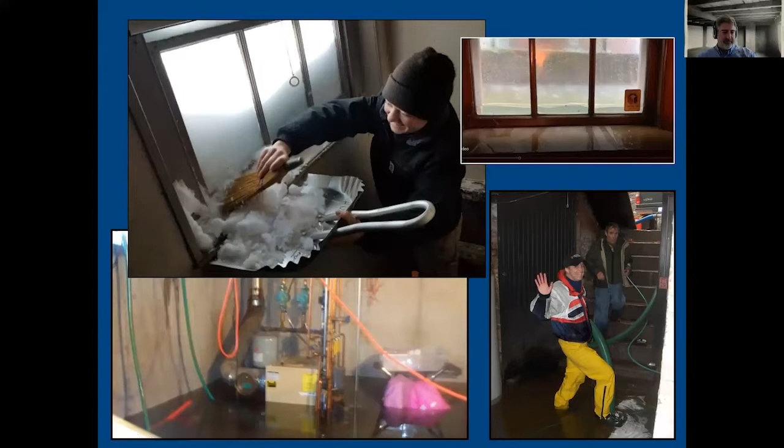Mary had asked me to talk about some of our initiatives. And so I'm going to focus on three different aspects of climate change and the resiliency work we're doing. And I'll say that we are very, very focused on rain events. I think July and August have been the rainiest in a long time, as 17 inches have fallen. We had an additional 6 inches in the last week. It's a lot of rain. And when you're dealing with a collection of historic properties, you think about rain all the time.

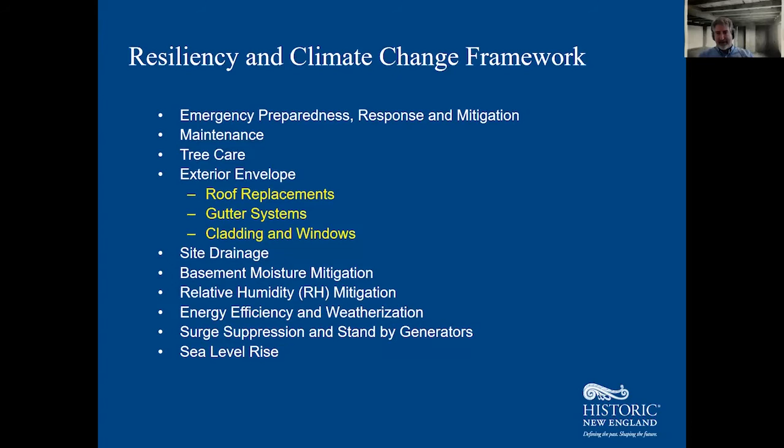And that's not to downplay, of course, sea level rise, which I know Nantucket is very focused on. But I spend a lot of time thinking about rain and how water is coming down from the sky and affecting our properties. As Mary mentioned, we do have a framework for resiliency and climate change. There's lots of items here on the list, but we're going to really focus on three different initiatives that we've been working on at Historic New England: gutters, site drainage, and energy efficiency.

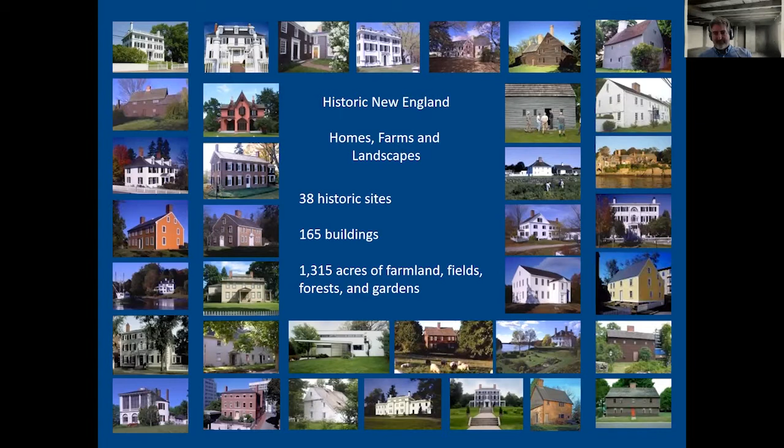Historic New England is a regional preservation organization. We do many different things, but one of our most public aspects is the 38 historic sites, which range from Rhode Island up to mid-coast Maine, 17th century to 20th century houses. There's over 165 buildings and over 1,300 acres of landscape. And I'm responsible for the preservation and maintenance of those properties. So everything from brush clearing to garden restoration, from heating system maintenance and gutter cleaning to roof replacement. All of it is in the effort to keep our properties looking the way they did at a specific time.

So my job is also very focused on house museums and presenting a period in time. So it's a little different than a house in a historic district, which may have certain restrictions on it. We actually take it to the next level because we're really trying to preserve things to a very specific time. And that sometimes is limiting in how we can approach things. But I think climate change is shaking things up a little bit and forcing us to rethink some of our approaches.

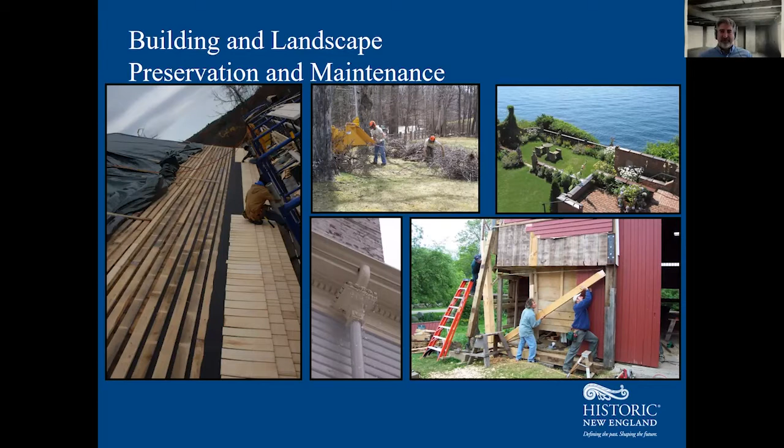So let's start with gutters. And I think we have to start in 2018 when we received a grant from the Maine Historic Preservation Commission through the National Park Service to analyze the carrying capacity of our gutters in that state. And so we started with 3 core questions. And I'm going to give you the answers that I thought we were going to walk away with from this study. Are our gutters good enough for today's rainstorms?

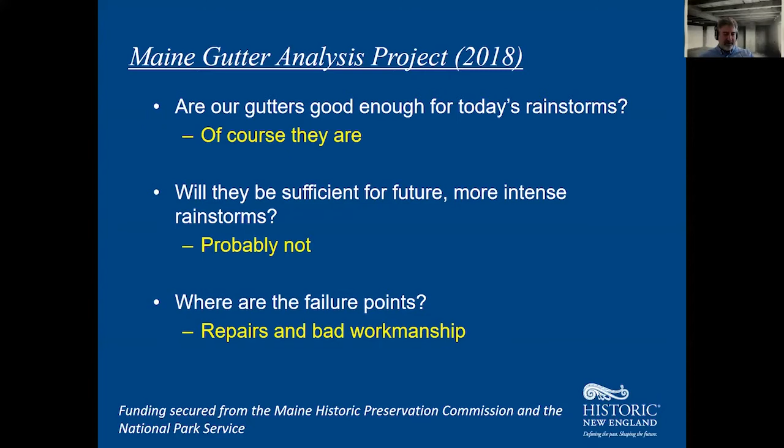Of course they are. They seem totally fine. Will they be sufficient for future more intense rainstorms? Probably not, right? That's the whole thing about climate change. Things are just going to get worse. So probably the gutters won't hold up long term. And then what are the failure points? We were kind of perceiving some repairs and bad workmanship being the core issues that might be stopping up some of our gutters and kind of preventing the flow of water. So this was our hypothesis going into this study.

And why gutters? Well, of course, it's part of the major defense system for your building. So you've got the roof keeping the water out, but then the water runs off the roof into what? Well, either the ground or a gutter system. So that's keeping the water off the side of your building. It's keeping it from the foundation of your building. And if the gutter system fails, then the water starts to deteriorate the paint. It starts to get into the wood. It starts to work its way into the building in many different ways. And we've seen a lot of them at Historic New England.

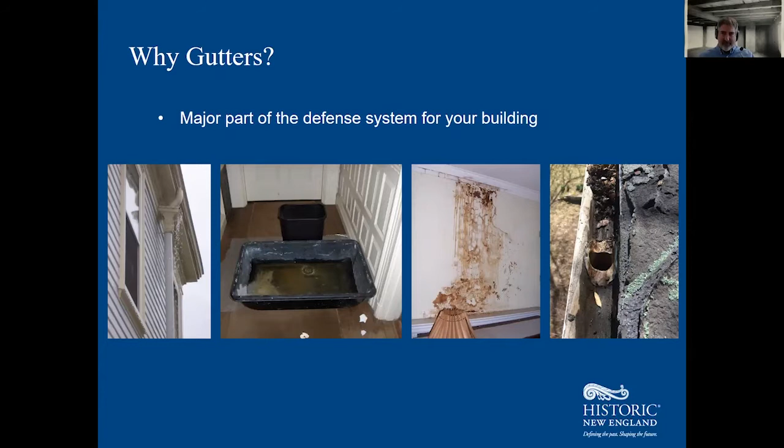So this gutter study, we had 9 sites in Maine that we were looking at, 7 of our house museums, and then Historic New England also has an easement program with 116 easements, so private homes with preservation restrictions that we hold and monitor. And so 2 of those easement properties were included in the study. So 9 different sites throughout Maine, and we were looking at 21 different roof drainage systems. So it was like 21 different instances where a roof and a gutter kind of met up.

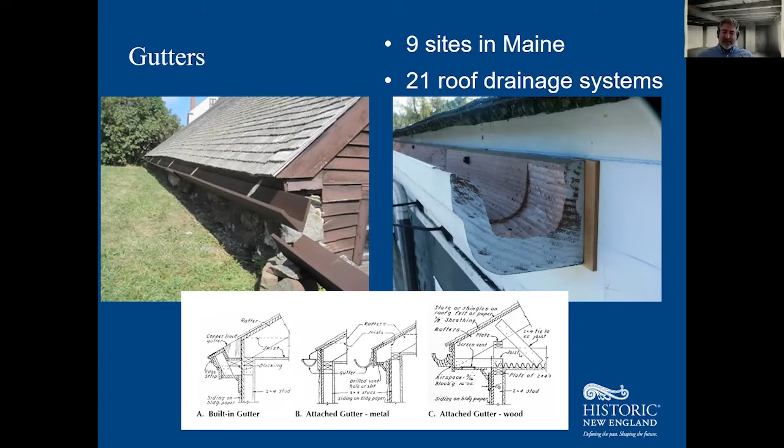And what we were doing was we were calculating for capacity, and there's some standard formulas that you use. If you Google this, you'll find there's some key factors like the area of the roof, the slope of the roof, the intensity of the rain, and then the dimensions of your gutter component. If you're designing from scratch, you do the first 3 and figure out what the dimensions should be. We had to do a little reverse math to figure out that's what it should be, but this is what we have, and how does it all match up? So there was a lot of math, a lot of charts, a lot of cross-referencing. But let's just remember the rain intensity.

So we're looking this up online, and most of the online resources that are telling you how to calculate rain intensity are all pointing to basically the same data charts. And that's really important because the data charts are from 1977. And so with gutter calculations, if you just did it yourself, you would probably be led to make a calculation based on 1977 rain.

We found the National Weather Service has more up-to-date rain intensity numbers, and there's this kind of complicated 10-year rolling average that they use to figure out what a 10-year, 20-year, 30-year storm would be. And so we went to the National Weather Service and we pulled more up-to-date, like 2015 numbers for rain intensity, and it was a 25% shift. That is major. That is a major change in intensity from 1977, and that really does affect how you design your gutters. And so that was a really important data point in this project.

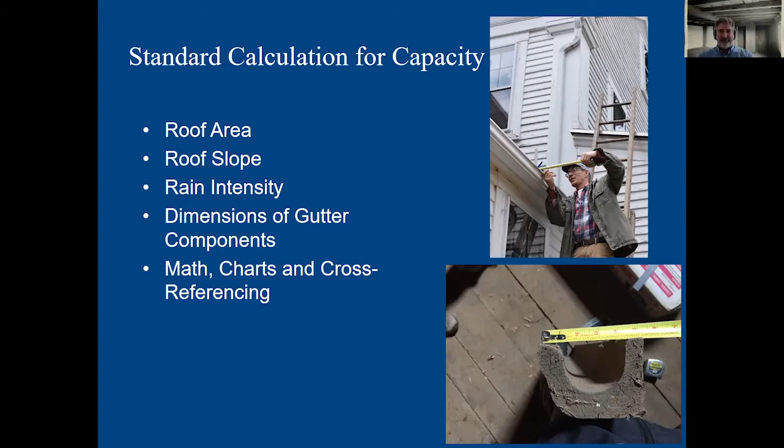So what did we find? We looked at all of these gutters, we did the math, we crunched the numbers. And there's three components to a gutter system that we were really looking at. So the gutter is obviously the horizontal piece that's kind of at the end of your roof, the eaves of the roof.

And what we found was 50% of the time, the gutters failed the calculation. They were not big enough. They didn't have the carrying capacity for the roof that they were trying to empty of water.

Now there's a lot of variables there, a lot of different types of gutters that we looked at. We looked at modern gutters, we looked at wooden gutters, we looked at half round metal gutters. There's a lot of different variables, a lot of different size roofs. But still, in the end, there was a high failure rate for gutters.

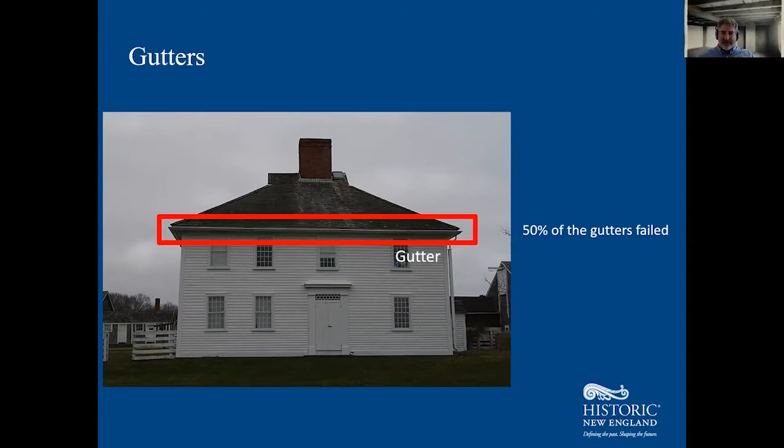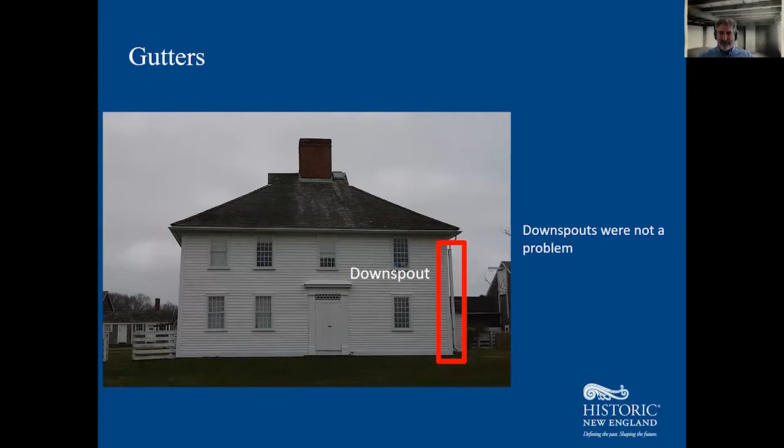Downspouts, so the pipe carrying the water down the building, effectively at that point, the downspouts were not a problem. Once you got the water running down like that, that wasn't really where our problem was. Our problem was really in this outlet. The outlet is this pipe that connects the gutter to the downspout. And what you find over and over again on historic houses is this tiny, tiny piece of metal, this little pipe. And that was a core issue.

50% of our outlets failed, and there was a lot less variability on this. Either it was under 2 inches and it failed every time. So the diameter of the outlet was under 2 inches, or if it was over, it had a much greater success rate. And so this is some key data that we pulled from this choke point.

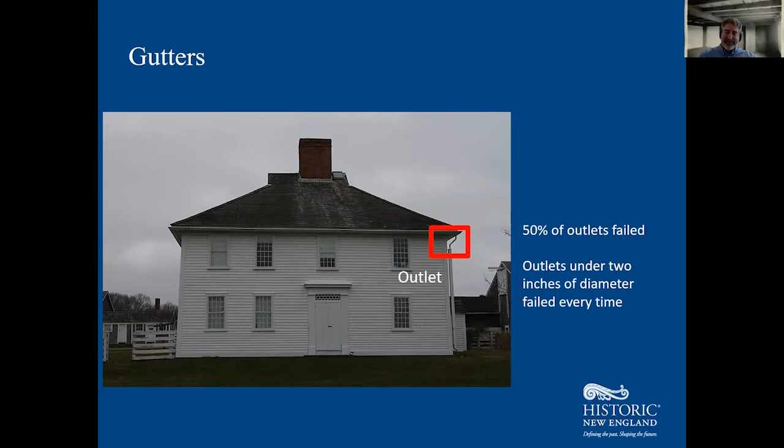If you can imagine it, you have all this water rushing down your gutter, like in this image, and then there's a tiny hole. So where's the water supposed to go? And what we always perceived as maybe a clogged gutter was in fact water not able to drain fast enough down the tiny hole and overflowing the sides. So we always said, oh, the gutter needs to be cleaned. But then you go up there and it's kind of fine. I wonder why all the water's spilling out like that. Well, it's because the hole is too small.

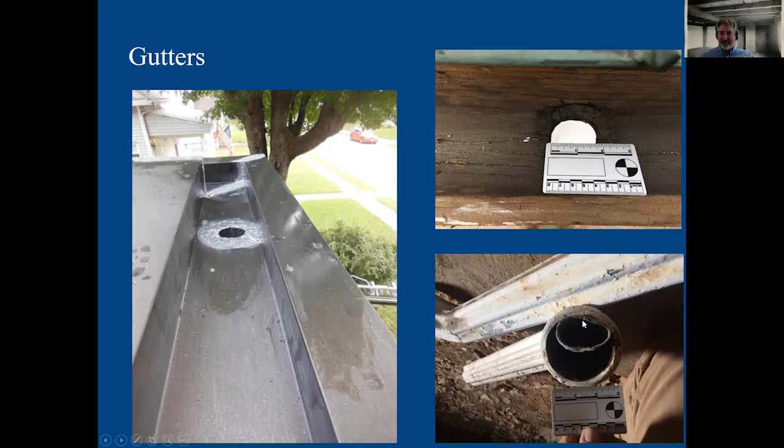And again, here's a wooden gutter with a less than 2 inch hole. And then just to illustrate, here's the outlet, why the downspout's not really an issue. It's a really small downspout, but look how small the outlet is. So the downspout is going to carry the water fine once it gets there. It's really, can you get the water to the downspout?

So if we go back to the initial 3 questions that we posed, are our gutters good enough for today's rainstorms? Well, no, actually, they were not. We had lots of issues. So will they be sufficient for future more intense rainstorms? No, if they're not working today, what makes us think that in 20, 30, 40 years, they're going to be working better? They're not. The rain's just going to keep getting more and more intense if the predictions are true.

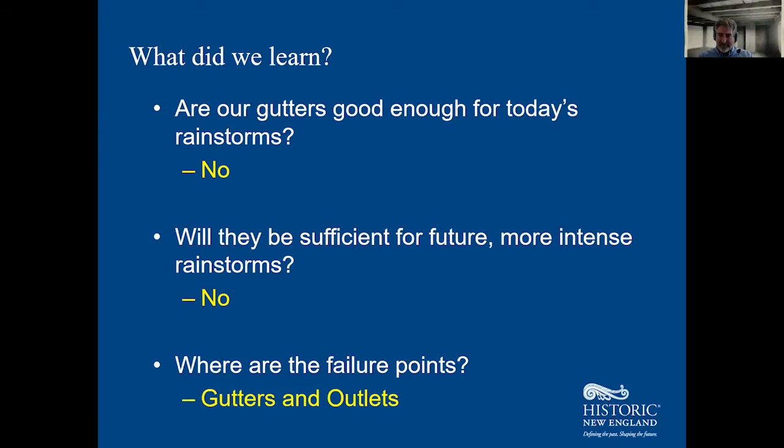So what are the failure points? It's not the downspouts. The downspouts are almost irrelevant. It was the actual gutters and the actual outlets. And so this is critical, right? This is a major point of defense for your building.

So what we're thinking about is, first of all, you've got to pay attention to your gutter. It's kind of easy sometimes to ignore it. Mine at home gets clogged all the time, and I've got to go up and clean it. But you want to kind of ignore it because it's just this chore. But you've got to pay attention. This is really important to keep the water moving.

As I mentioned, if you're going to calculate, or let someone else calculate the size that your gutter should be, use the current rain data. Make sure you really understand what is going on. Now, Maine was 25%. We did the same exercise in Rhode Island, and Rhode Island's change over 1977 to 2015 wasn't as significant. So it's going to be different, region by region, town by town. But you should look at that data, because it's really important, and make sure it's as up to date as possible, because you want to think about sizing when planning a project.

Now, this isn't just a new roof, a new building and a new gutter. It's your existing gutter. So if your gutter is starting to fail, or it's not working, or you're doing the roof and they say, hey, we should replace the gutter at the same time, think about how big it is. Think about whether it's carrying the water. Think about whether you've seen water spill over the sides. Maybe do the calcs, or ask someone to do the calcs for you to figure out what's going on.

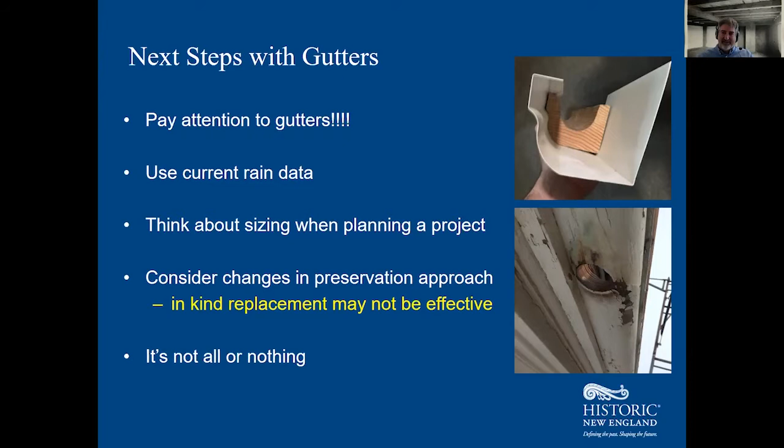And so it's not all or nothing. We can do baby steps also. And we've been seeing great success where we've just increased the outlet size. They're calculations, it's math, and it's giving you a pretty strong sense of what's going on. But if you need to, you can just do part of it. And that's kind of what we're doing with gutters.

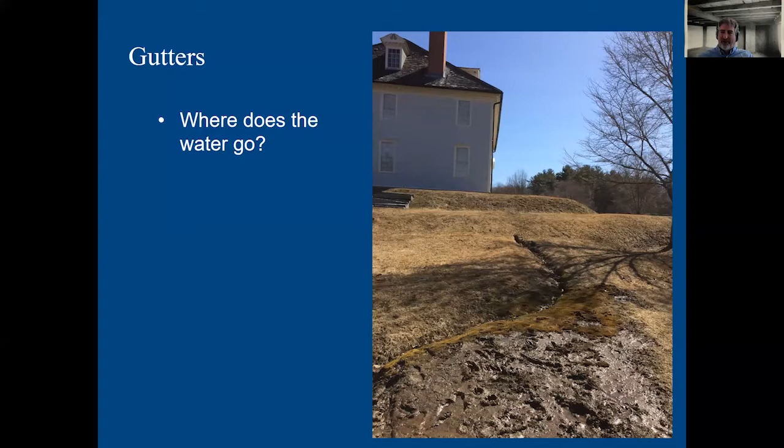But 40 years ago, they said, we're going to outlet the water here in the middle of this terrace. And actually, this was never an issue. But now that we're getting more and more intense rainstorms, we're seeing dramatic erosion at the outlet spot. And so you really have to think about where the water goes once you get it off your roof. And so that's our next point, which is site drainage. And we're spending a lot of time really focused on how water moves around our sites.

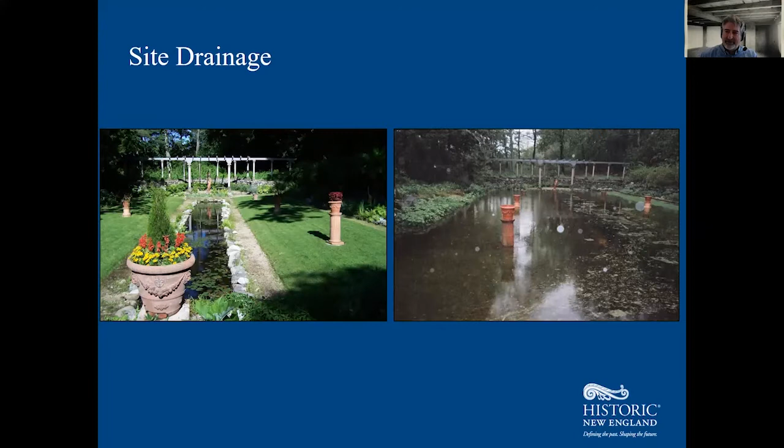And a lot of this came in part in 2010. There were some huge rainstorms that struck the area, and everything was overwhelmed, and we got flooding everywhere. And it made us really think about site drainage. And this was long before we were even thinking about climate change, but we were saying, hey, we've got an issue with water on our sites, and what are we going to do about it? And so we really wanted a holistic approach, because I could fix one thing, but it may cause another problem somewhere else. And maybe we should look at the whole picture.

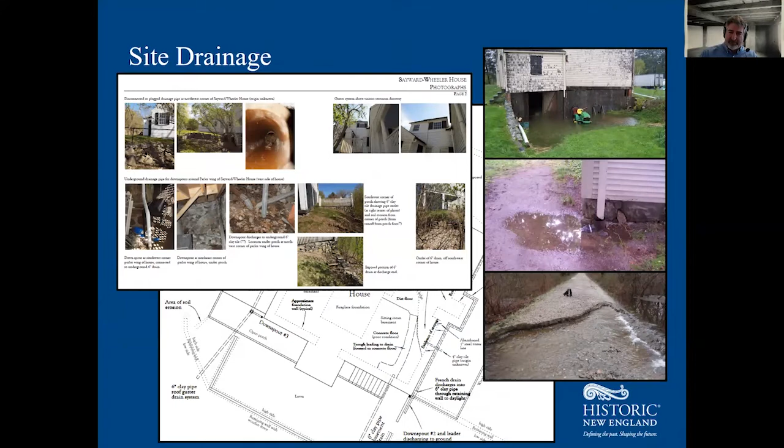So we did holistic site drainage assessments, where we were like, how is the water moving at all of these different sites? What are the components, and what is working and not working? And ultimately, how does that all play together in a big project to solve all the site issues with drainage? Because again, it's like a ripple effect. If you change one thing, it probably will ripple over to another area.

A colleague of mine just showed me a gutter example, where they upsized one gutter to handle the rain because they were seeing water fall down, but they weren't really paying attention to the fact that all of that water was outletting onto a secondary roof, which still had a very small gutter. And so they resolved one issue and caused the ripple effect. Now they're causing an issue in a second place where the water overflows, hits the ground, and gets into the foundation. So again, holistic thinking is really important, especially when you're thinking about water and how it moves around your site.

Now, we have the added issues as a house museum organization. We have archaeological artifacts, and we're very careful about those. And so we'll work with an engineer, we'll design a plan, but then we bring in the archaeologists and we figure out what's going on under the ground, where maybe the engineer wants to do stuff.

Then we tell the engineer, like, these are deal breakers, you have to change your plan. The engineer gets mad, but we're a preservation organization, so we're trying to protect the resources both above ground and underground. But eventually we come out with a plan. Now, the other wrinkle is that I want to do this work with a minimum of change to the historic landscape. So we also want to respect how the grounds look before, and we want to keep it as similar.

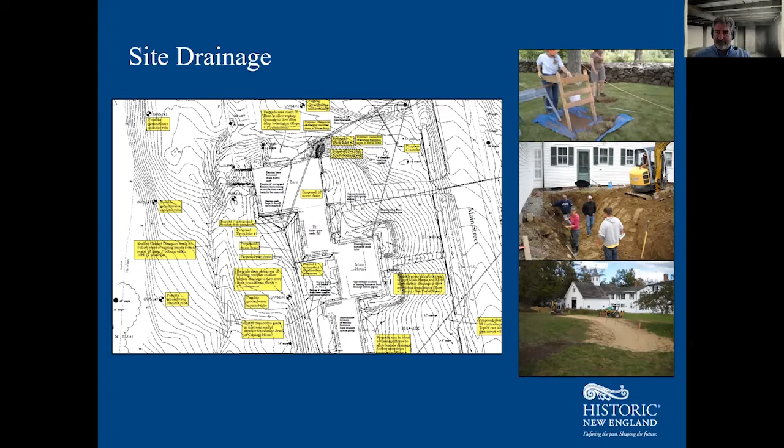So again, our points about site drainage are really about thinking holistically. We favor gravity. You can use pumps and you can do all sorts of things, but those will fail. If you have a power outage, the pump's not going to work anymore. And so then the water's not really moving away. So you always want to try to think of, water moves down and can you keep doing that? But also, it's important to think about the aesthetics of your site.

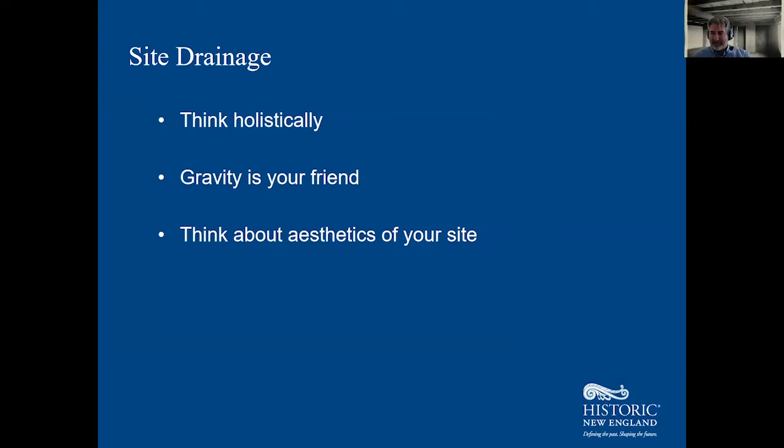But in all of that, and all of the catch basins and dry wells and different site drainage things we've added, we still haven't really solved the where does the water go, because it's still got to go somewhere. And most sites and most towns will tell you have to keep it on your own site. And so how do you do that?

And sometimes we're blessed with large acreage, and obviously we have houses in urban environments where we don't have a lot of space, and we have to tackle this in all of those, because even if you have a dry well, there needs to be a release valve for when that maybe gets stressed by storms. So then that's releasing water. Where is that water going? It's like a never-ending series of questions.

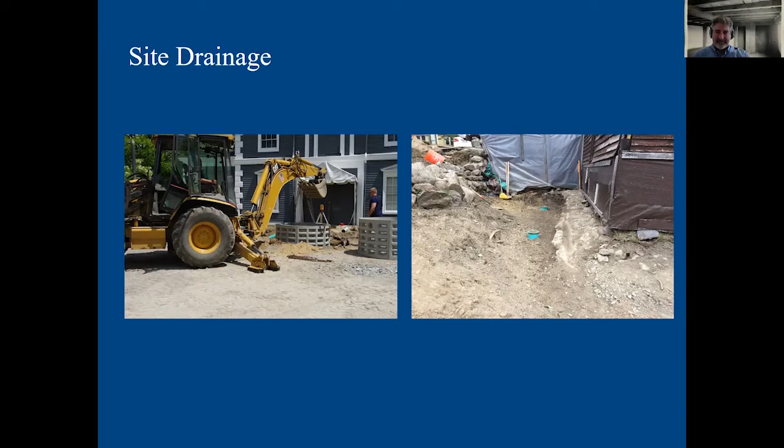And really, in the early days, we were focused on what's called a level spreader. And this is a horrible image, and I couldn't find a good image of this, but basically we have all of this kind of water being channeled, and it's got to come out somewhere. We've got to just let the water go. And so at this site, all the water kind of gets merged underground into a location where we can then outlet it with basically a 100-foot gravel trench that allows the water to kind of push out over the gravel trench, not cause erosion, and then filter back down into the groundwater in that way.

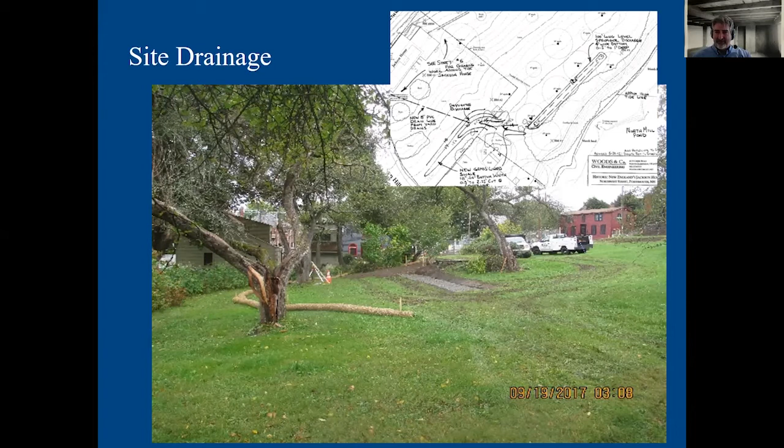And that's effective, but for me, in terms of historic landscapes and aesthetics, we can usually hide this, but it's not my favorite approach, which is fascinating because now we're in the age of really thinking these things through. And so enter rain gardens. We only have 1 or 2 at our properties, but the rain garden is also an alternative for stormwater management.

One that's very effective in many locations, in many urban environments, where you're taking the water and you're basically creating a bioretention area where you're allowing these kind of swampy water plants, so all natives, all kind of good for the environment, to take that water, help absorb it, but also help filter out the bad stuff in the water, while then the water sinks back down into your groundwater.

And so this accomplishes many different things. It provides that kind of pollution filter. It provides the groundwater that the level spreader does, but it also provides this interesting habitat opportunity with native plants. And what are you doing there?

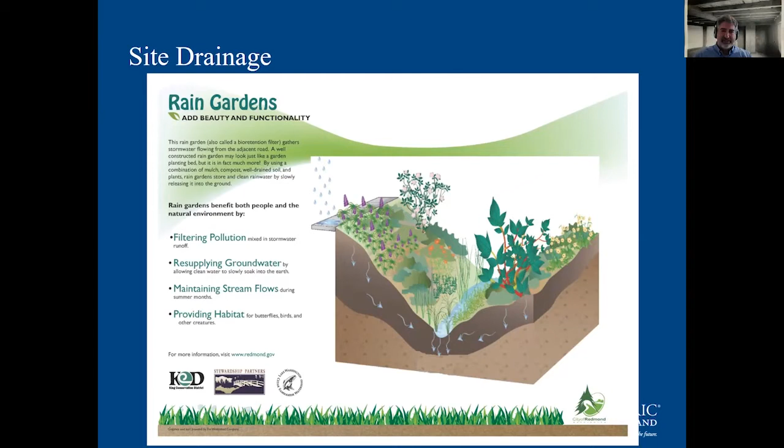And so for me, that gives some opportunity to rethink how we present some of our landscapes, and even reintroducing more native plants in a specific way to help mitigate stormwater management. That's also aesthetic and also good for the environment. So this is kind of the area we're exploring.

So I didn't really talk about climate change with our site drainage, and in part that's because it's been very effective so far, and we haven't had to change very much of our approach. But we are deep in planning 3 different kinds of site drainage projects with 2 different engineers, and we've been discussing this topic with them. So, my experience with the gutters tells me we need to upsize everything.

My experience with the civil engineers is that, unlike the roof planning, which maybe is a little bit more contractor based, maybe an architect does it, maybe the homeowner does it like us, there's a little wiggle room. I'm not qualified to do site drainage engineering, and neither is a contractor, and so we hire an engineer, and the engineers are thinking about this stuff, and they're also using the data that we need. They're using modern data, like the code tells them to go get the current data from the National Weather Service. So they are thinking about this.

That being said, we've had many conversations where they're like, oh, all you need is a 3-inch pipe, and we say, okay, that's great. How much is it going to cost just to upsize that to 4 inches or 5 inches? It's underground, no one's going to know, we're excavating now. Can we make this bulletproof for 100 years? And the upcharge with going up in size like that isn't that significant when you're dealing with a major project. And so we've been making those modifications.

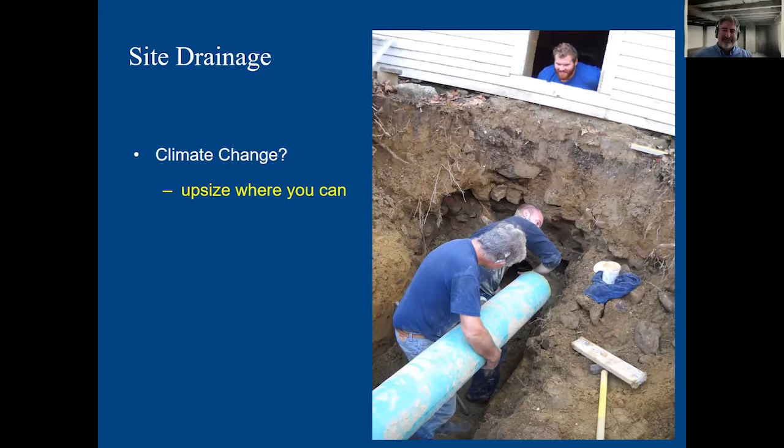Now it takes you as the homeowner or the landowner to be aggressive enough to ask those questions and to push a little bit if they push back. But you can usually get your answer in there, and that's what we're trying to do. These systems are working and they are good, but are we really prepped for longer term stability and resilience at the sites? And so sometimes that might just be changing the pipe size a little bit. So it's definitely something we're talking about and deeply immersed in.

Not every single one of our 165 buildings has a heating system, and our heating systems are all kind of variable because we're working with museums. So some of them are maybe a little bit more geared towards humidity control rather than human comfort. And we don't have that many air conditioning systems, so we're balancing a lot of different things than a homeowner would balance, but we're still using a lot of energy.

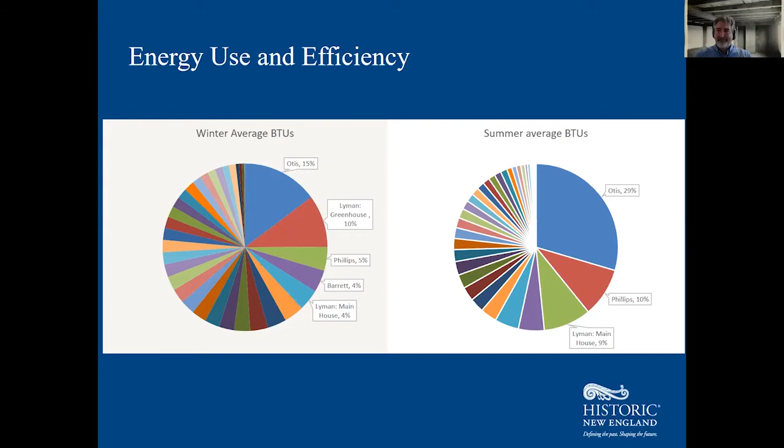So about 10 years ago, we started really thinking about this. Now, I will fully admit 10 years ago, it was all about money. It was about saving money. It wasn't about saving the environment. Can we make the systems more efficient so that we're spending less on utilities? That feeling obviously has changed these days, because we've realized that there's a whole other role we can play with these 38 sites, but the framework we developed is still quite effective.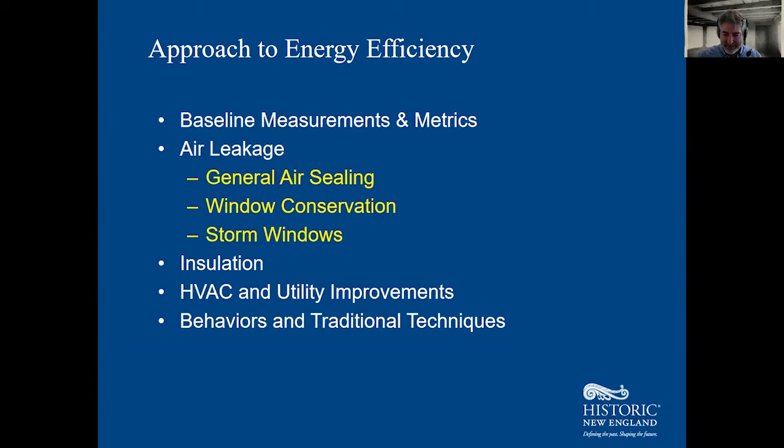And so our approach to energy efficiency is really about baseline measurement and metrics, air leakage and stopping what air leakage we can, insulation, HVAC and utility improvements, and then thinking about behaviors and traditional techniques. And that may need to go first, possibly; maybe before you do the improvements, we should talk about behaviors and traditional techniques. But ultimately, this is kind of the program that we're looking at.

And I'll highlight two different examples throughout this. We did the 1793 Lyman Mansion in Waltham, Massachusetts, where the goal was to reduce energy usage 50%. We didn't have quite the same goal at the Pierce House, but this was more of a residential style house, though it has quirks because it's a museum and education site that a homeowner wouldn't have. But this was to take that more urban residential house and see what changes we could make.

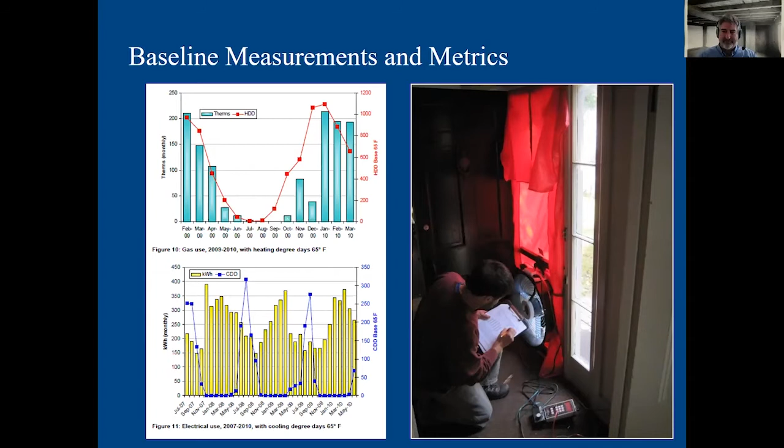And of course, air leakage is kind of symbolic of wasted energy, because if your house is leaky, you're either letting in a lot of cold air or you're letting out hot air. You're not being efficient in your use.

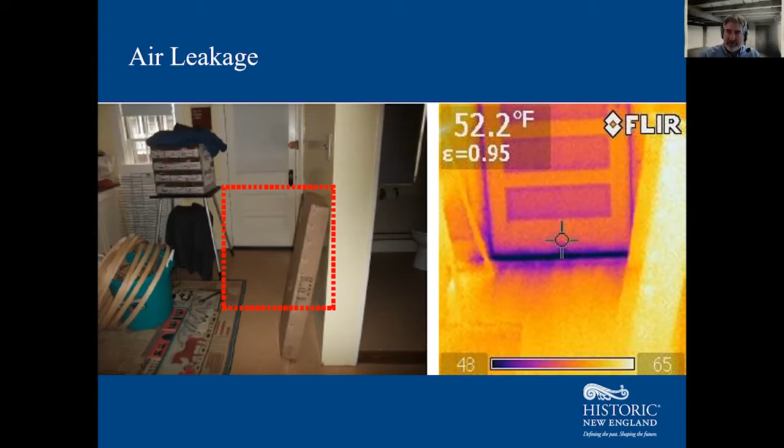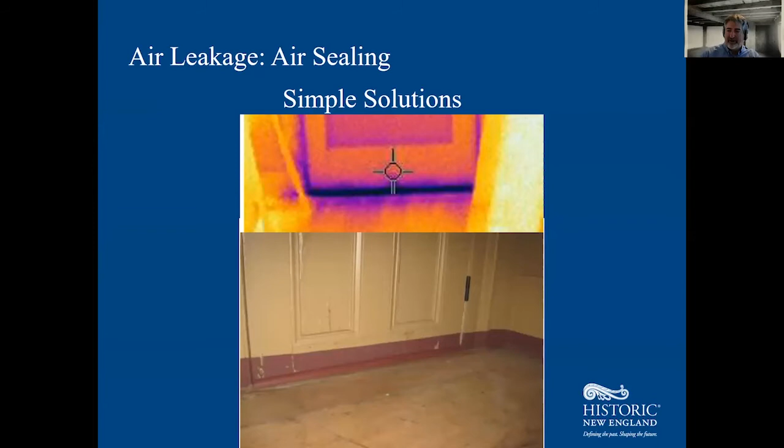And so with a lot of air leakage, we as a preservation and a museum organization favor simple solutions. And so maybe we will add a little door sweep, or in this case, we had a door that was like the fourth means of egress from the house, so it wasn't needed for safety issues. So we put just a piece of half round molding there just to stop the airflow, just little things to keep the air in the building.

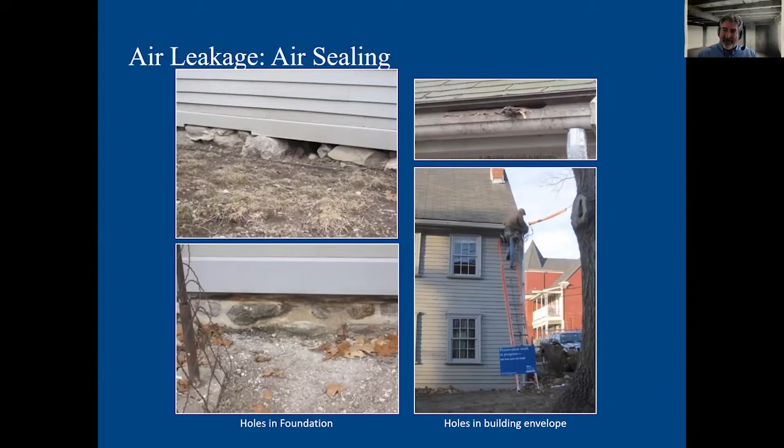Likewise, on the exterior, the foundation is letting a lot of air in and out. Well, let's repoint the foundation and use good preservation practices to seal it up. Oh, look, air's coming in and out of the house. Look at that hole by the gutter. We're going to fix that. And all of a sudden, you're improving your efficiency with every repair you make.

Likewise, what is a good air barrier? Historic plaster. And so we looked at a couple locations where we had let plaster not be repaired because maybe it was in the basement or somewhere else, and we said, okay, we're going to repair the plaster and get a better air seal in between, say, the basement and the upper floor, or one of the floors in the attic.

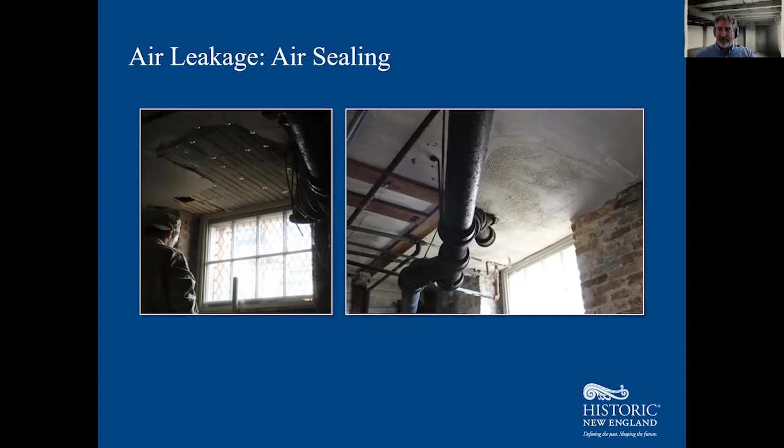What we don't like is spray foam. I think we're one of many that don't like it. For us, again, similar to energy usage, this started as more of a purely preservation-focused thing, where spray foam is hard to remove. It's theoretically not permanent, but it's kind of permanent, and it's just awful stuff. And now we find out it's also awful for the environment. I'm not an expert on that, but I did a quick Google search last year and was like, oh, this doesn't look like good stuff to use.

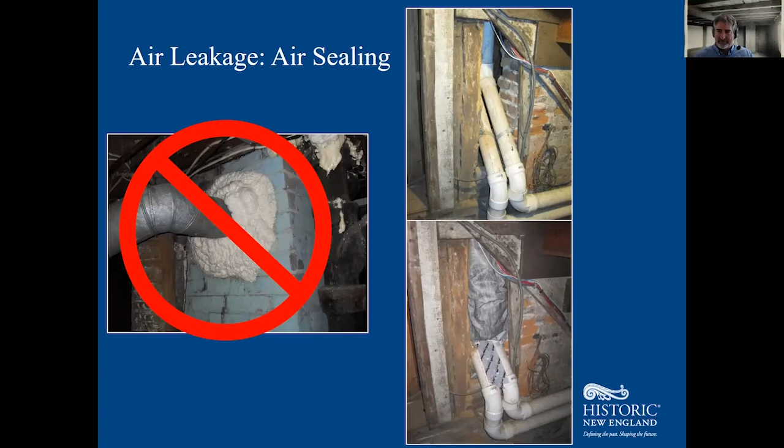But what we had done is, we have giant gaps, like the right-hand top picture has giant gaps in the Pierce house. How do you fill that? Well, we fell back on Tyvek pillows, where we took Tyvek, stuffed them with insulation and then stuffed them in the gaps. And we basically stopped the airflow through these gaps with something that we can just grab and pull out if we want to. So reversible, in a preservation focus.

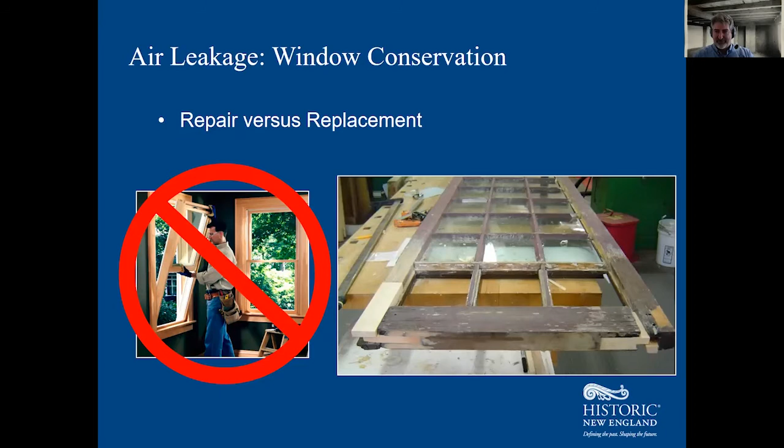Of course, we don't favor replacement of windows. Again, the durability and quality of a historic window far exceeds a replacement window, and I guess they're still making arguments about energy efficiency, but there's ways around that. So we still favor the repair. Now I'm a museum, so again, that is my go-to, I have to repair these things. But think about the waste.

If I was doing the Lyman Estate, which had 120 window openings, and we fixed every single one of those as part of this project. Imagine if we replaced every single one of those windows in an effort to make the house more efficient. The landfill from just this project alone would be tremendous. And then think about the lifespan of the new materials versus these 150-year-old windows, because we knew they had been replaced partway through their life, but they're 100, 150 when we touch them, and they will definitely last another 150. So again, that lifespan, that green aspect of historic preservation.

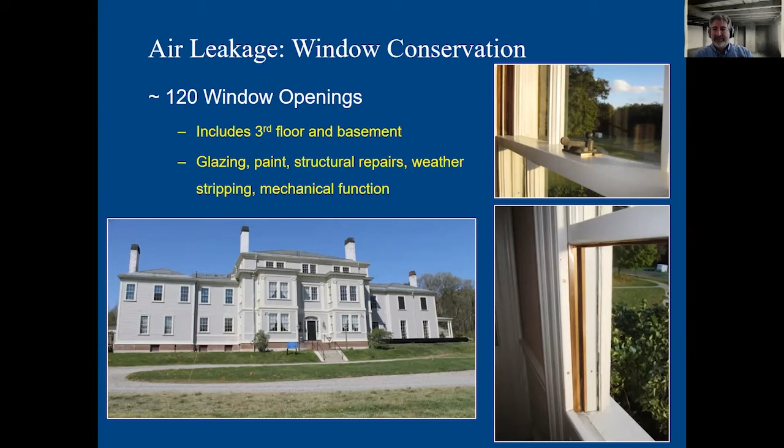But while we were doing that, we made sure all the locks would work so we could get a good tight seal, and we put spring bronze weather stripping on the sides of the windows to keep things tight. So we wanted to seal the windows as much as possible, not let extra air leak through. To achieve greater insulation and efficiency, we use storm windows.

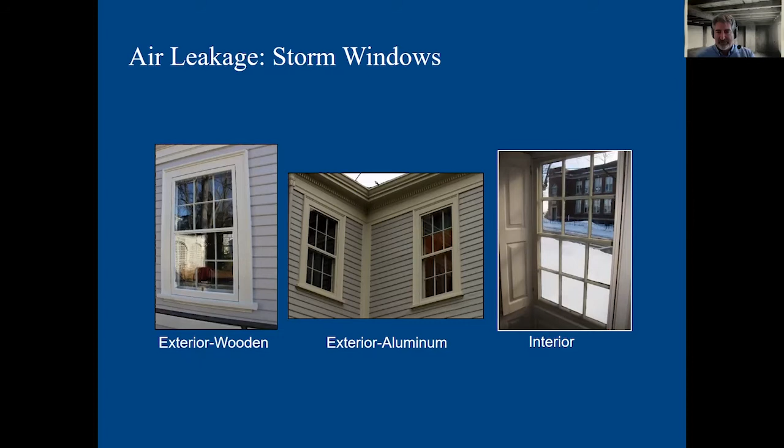And so in this case, we actually used 3 different types of storm windows, because Lyman Estate served as a little study for us where we could play with exterior wooden storms, exterior aluminum storms, and then interior storms throughout the house. And as I said, we had a blower door, and we were able to close off one room and do testing before, during, after, at different times.

And so we did that in a couple different rooms, and ultimately the merged data said that when we conserved a window and did the little fixes to it, we reduced the air leakage 5 to 10%. It is a little bit variable, and there's a lot of other variables in it. When we added a storm window to that, we reduced air leakage another 10 to 20%.

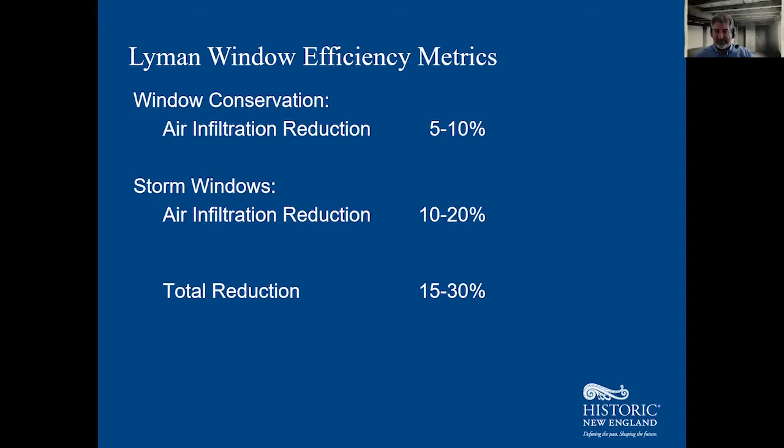Now the interior storm worked a lot better than an exterior storm, but that's because usually on the exterior, you have weep holes to make sure water is venting out from that side of things. So you actually have some natural air flowing into the storm window, so it's going to be a little less efficient. But our total reduction in air leakage just from windows alone was 15 to 30%. So that was awesome, and that was a great metric for us to have, because the next phase we were thinking about was insulation.

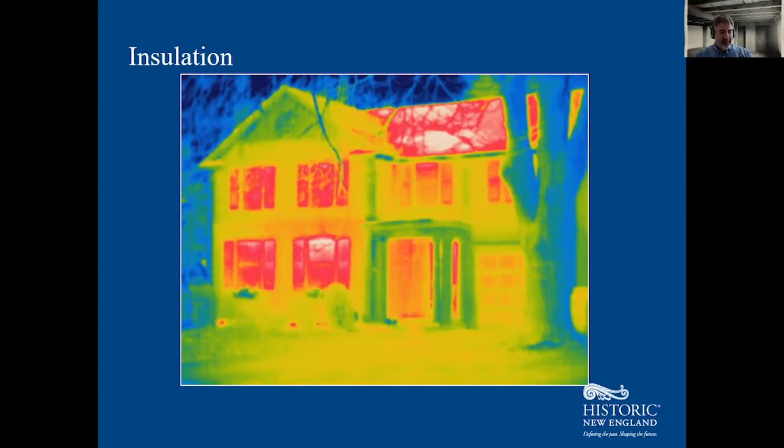And why not the walls? So I spoke to several building scientists, and we talked about some of our buildings specifically, and their response was, we could insulate the walls, but we don't really know what the dynamics are really going to be inside your walls. We don't know how moisture is going to move from the in to the out and out to the in. And if we were building a new house, we would be able to control that. But in an existing house, we can't really control that unless we strip the house down to its studs.

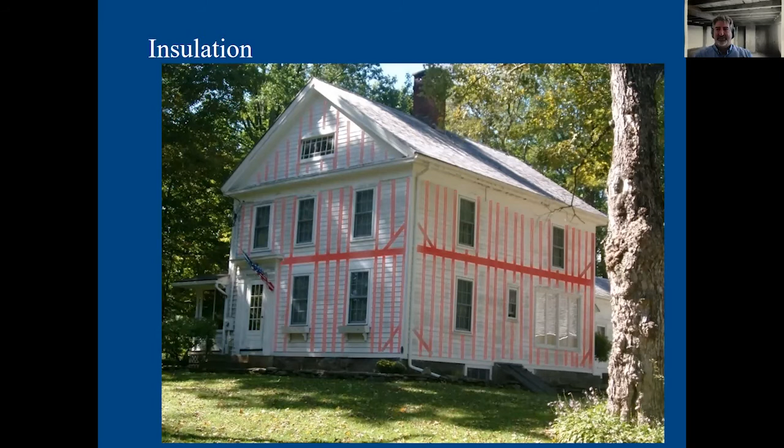And why is that? So I just highlighted the structural framing of this house, which you can see perfectly with the mildew staining. So you know exactly where the studs are in this house and where the insulation is, because the insulation is capturing the moisture, getting wet, not really drying, and then creating that moisture issue transmitting through the walls. So again, does that mean it happens with every house with insulation in the walls? No. But this was the danger, and this is why we chose not to insulate our walls.

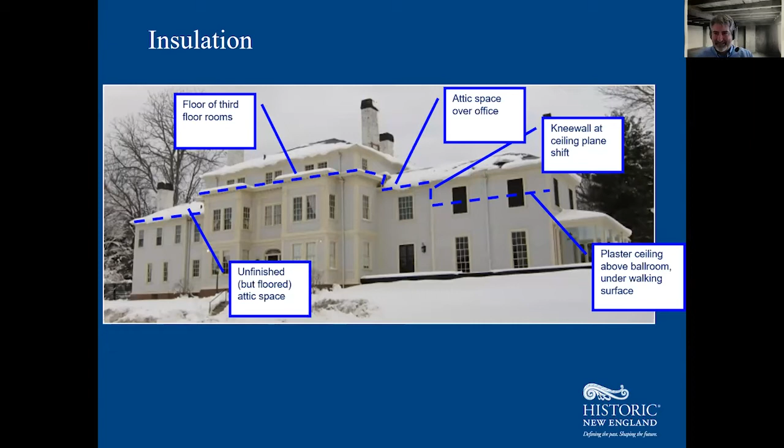But we do cap our buildings as best we can. And in the Lyman Estate, it was very complicated. And by capping, we're trying to create that barrier between the heated space and the non-heated attic or upper space. And so looking at the Lyman Estate, it was complicated, but we figured we actually had a way to create this barrier between conditioned and unconditioned spaces. And we had the opportunity to insulate these spaces. It was complicated and it was tricky, but what a great test study.

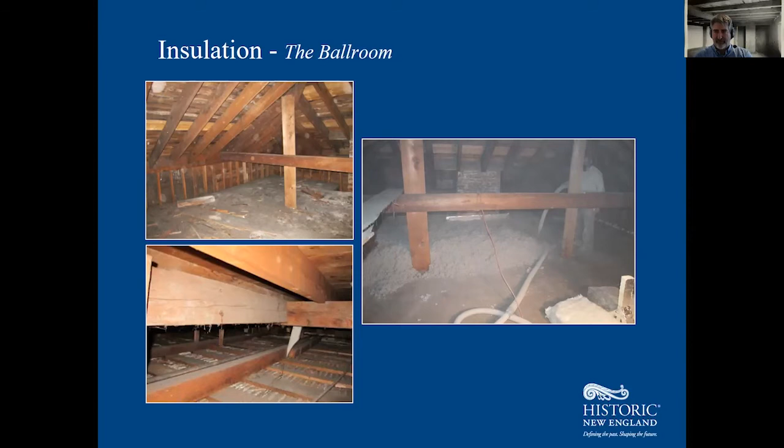So we did use dense-packed cellulose, blown-in cellulose, in a lot of the spaces because it was flexible and we could get it where we needed to go a lot easier than insulation batts. But you still have a ton of places with gaps where the insulation company wants to just fill with spray foam. And we had to come up with alternatives. And here's a giant gap next to the chimney stack.

And so what we did is we built barriers out of insulated board. And actually you can see in the corners, we shoved insulation into the gaps in between the joists to fill the gaps. All of this is so that when they blow in the insulation, it doesn't all just spill down the sides of the wall where we don't want it. We keep it controlled.

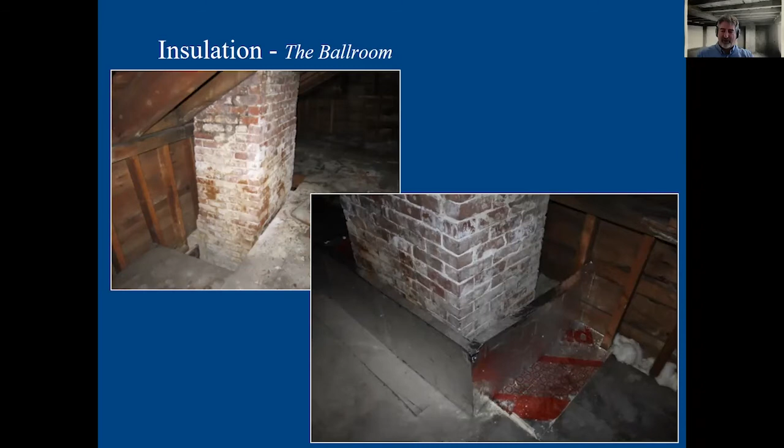Likewise, the floor framing was very supportive of this effort because the joists in most places were perpendicular to the floorboards. So we were able to pull one floorboard and then blow in every joist bay insulation and get maximum spread of insulation.

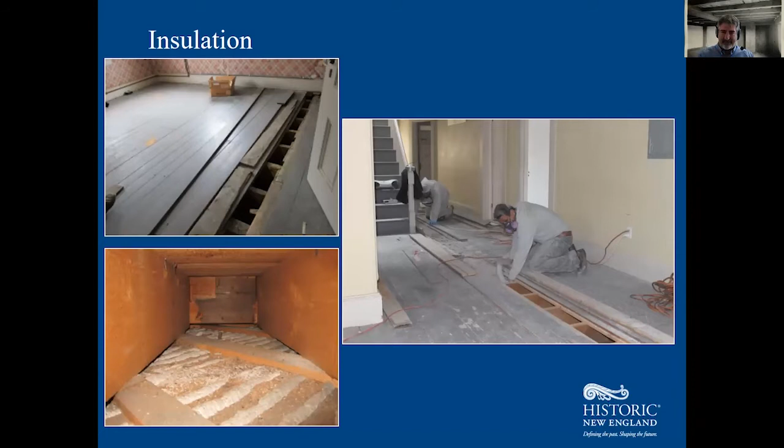The Pierce house was not as readily acceptable of insulation. So this is the attic. It is actually part of the museum experience at the tour. There is a furnished room upstairs. There is this kind of hobby station, which had a radio on it, and we keep it kind of intact as much as we can.

Likewise, the building was built in three different segments. And so the joists are just going all over the place. So you can't really just pull up one floorboard like we did at Lyman and blow in insulation. It was all over the place.

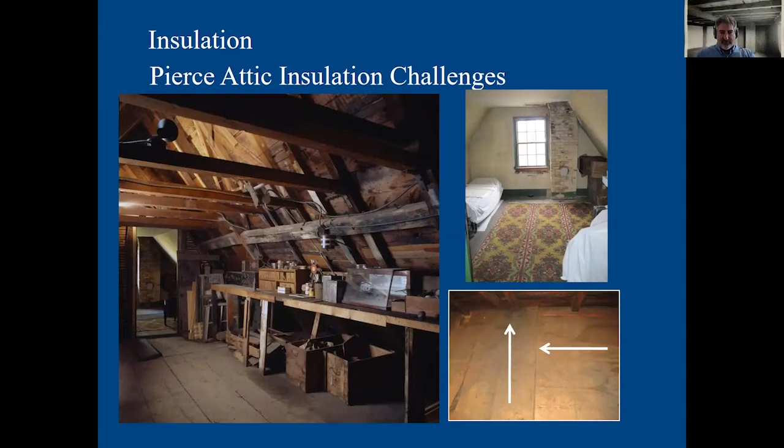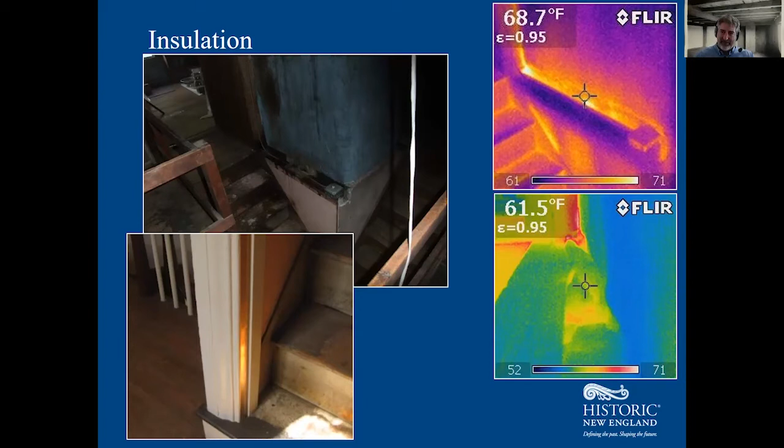But ultimately, in discussion with our building scientists, we were very focused on the fact that just some air sealing, like putting weather stripping on the door up to the attic, making sure the gaps were filled again, but also this concept that plaster is a great air barrier, and making sure the plaster ceiling in between the second floor and the attic was intact would give us not insulation, but an air barrier to make sure we're not at least letting hot air leak up constantly into the attic space. And so very helpful situation.

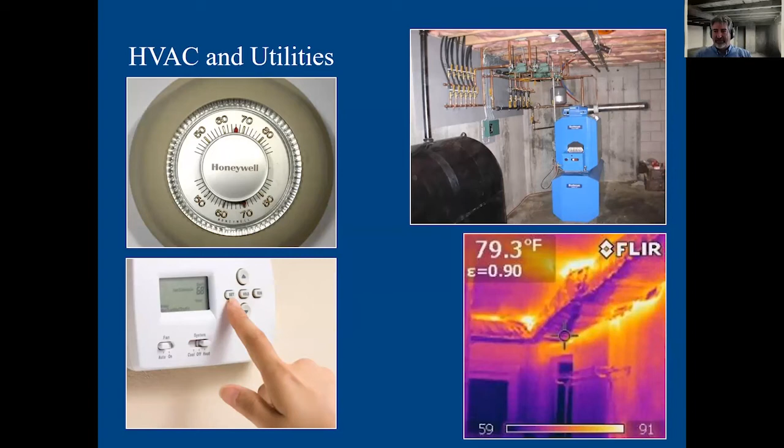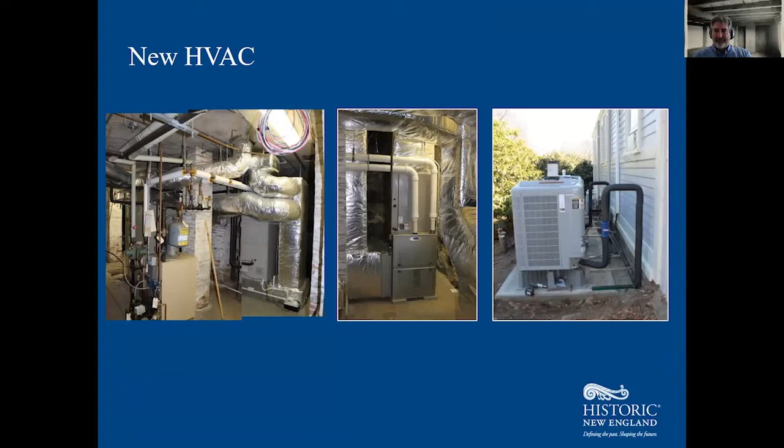HVAC and utilities, if you have them, you probably should update them because there's nothing worse than an old inefficient system. And that's what we had at Lyman. And so ultimately we replaced a very old oil burning system with a natural gas system, updated all the equipment with top of the line efficient models. We redid all the ductwork.

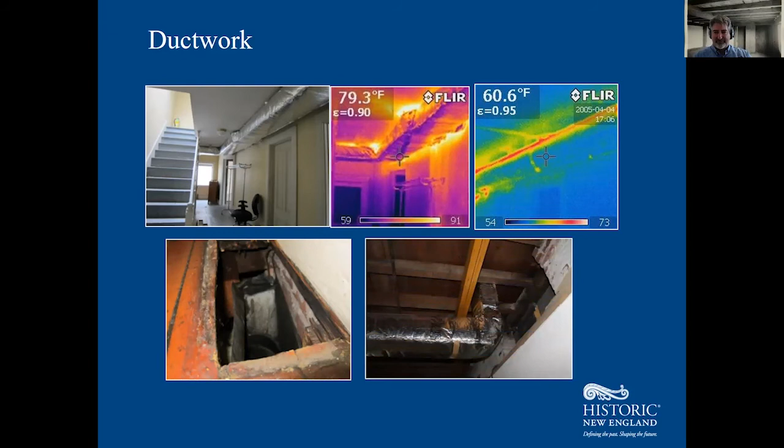Here is showing the old ductwork with massive heat loss, even with the insulation on, to the newer version. Yes, there's a little bit of a heat loss in this, but it's a much tighter production. Of course, our biggest gains probably were the fact that in the ballroom, this duct, what we're looking at is the floor, and then the duct that's supposed to be servicing the ballroom wasn't really connected. And in fact, there was like a 2-inch gap in between the duct and actually the bottom of the floor, which meant that not all the air was getting up into the ballroom. It was just going into the basement space below. And so we got that fixed, and that ductwork wasn't really insulated either.

So what did we get from all of this? At Lyman Mansion, we got 47% reduction in energy usage. And Lyman is a monster of a house, and it's very complicated, and its use is complicated because it's used for functions and all sorts of stuff. So not like just a homeowner, but yet we still squeezed 47% reduction in energy usage out of it just through those measures we talked about.

At Pierce House, we reduced air leakage by 30% in the house. And it was complicated. It's a complicated house and how it's used, but we also reduced the energy bills by 17%. Not quite as aggressive as Lyman, but we also didn't change the heating plant there, or we didn't do other things involved. So it wasn't quite as aggressive an approach.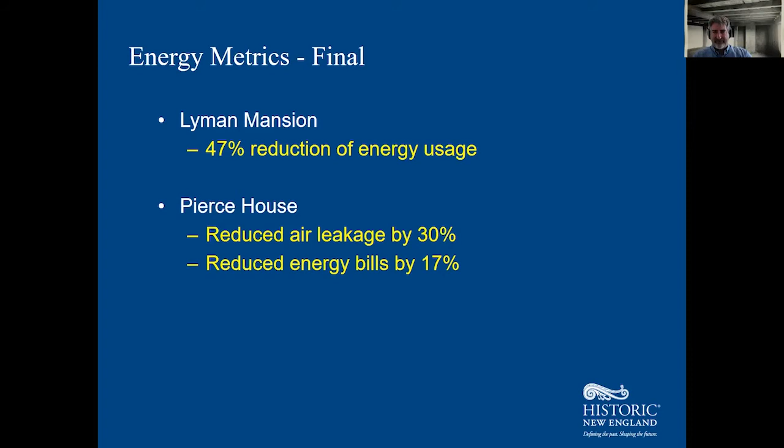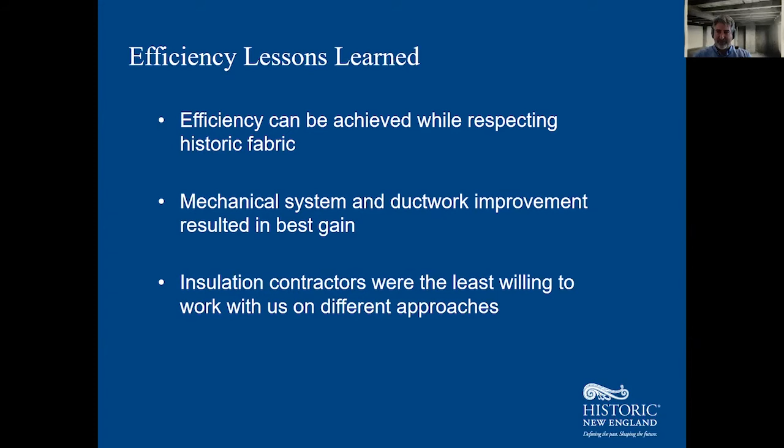So very successful project. And we learned that you can do efficiency while respecting historic fabric, and that, frankly, mechanical system and ductwork, as evidenced by Pierce only being 17 and Lyman being 47, I think that has a lot to do with our gains, those mechanical system changes. And then our anecdote is just insulation contractors that were not interested in working with us that much. It took us a long time to find someone that would kind of go along with what we wanted to do, because they just want to go in, spray foam, move on. So that was a little bit difficult.

One of the last points I have is just behaviors and traditional techniques. I think what we don't want to lose sight of as we think about upgrades to our buildings is that people have been struggling with this for a long time, and there's a lot of tools and techniques that have developed over centuries for dealing with temperature, rain, all of these systems.

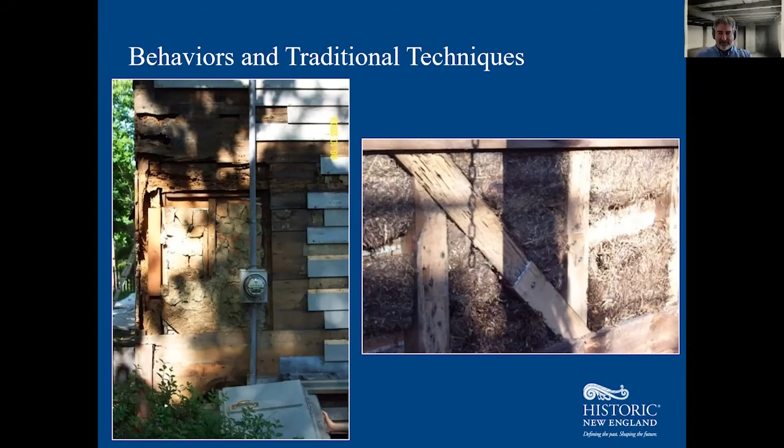So people have been playing with this stuff, including just deep porches, awnings, playing with your shutters, playing with your windows. What time of day do you open which window? A lot of these things were all designed to make these houses flow and get airflow and cool the houses without modern interventions. Likewise, even just the positioning of the house is really important, and how the sun interacts with it in summer versus winter, and having trees at the right location to block the sun in summer but allow the light in winter. All of this is very important, and all of this came to a full head this year with COVID as we tried to open our house museums.

So if you think about how the buildings were built and designed originally, that really provides us with some tools for the future. And maybe we don't need to be relying on electric for certain things, or air conditioning, if we're actually thoughtful about how our houses were used and originally situated, and all of these different factors play a hand.

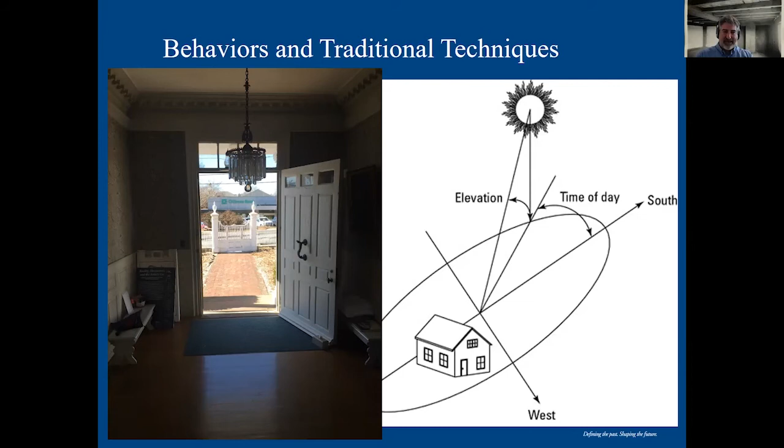And my final note, I'm going to stop here, is just, we are at the early stages of renewable energy exploration. I would say 15 years ago, we looked at it half-heartedly, and it was complicated, and a lot has changed since then. But I think it was maybe the first speaker, and Mary was making comments about how Nantucket harvested fuel in one way, like the whaling industry, and now maybe can harvest fuel in another way, which leads to the solar conversation this afternoon. And isn't that appropriate? And it made me really think. I was thinking overnight about this, and how many of our sites were independent.